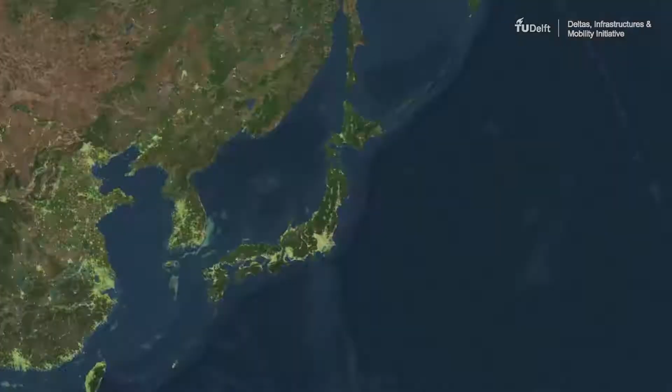Yuriage is in Tohoku, Japan, a region prone to frequent large earthquakes and tsunamis, and that has been struggling with a shrinking and aging population together with a declining economy for the last several decades. The reconstruction consists of the building of a coastal dike, which is the first line of tsunami defence, where also, through the implementation of spatial planning, residents were relocated from hazardous areas. The only rebuilding near the coast was for industries related to the fishing port.

Further inland, dikes were under construction along a canal to serve as a second line of defence against large tsunamis. The new residential area under construction further inland was made safe by elevating it by metres of landfilled earth. Public housing blocks doubled as vertical evacuation structures, whilst roads were designed to provide a straight route for horizontal evacuation.

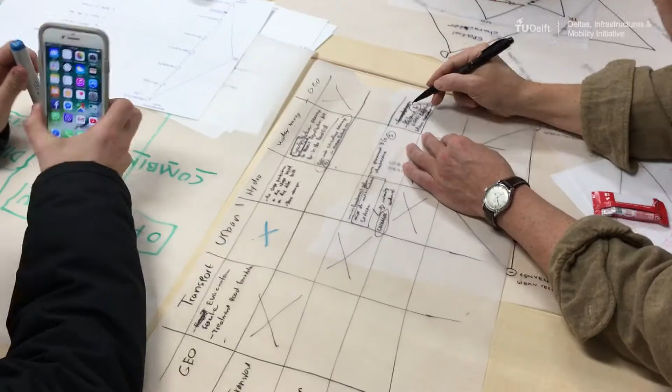By understanding, analysing and discussing the scope of reconstruction solutions from the point of view of each discipline, as well as in a team consisting of all 5 disciplines, methods for interdisciplinary working were tested, learned and experienced, and Japanese resilient solutions were applied to the Dutch case.

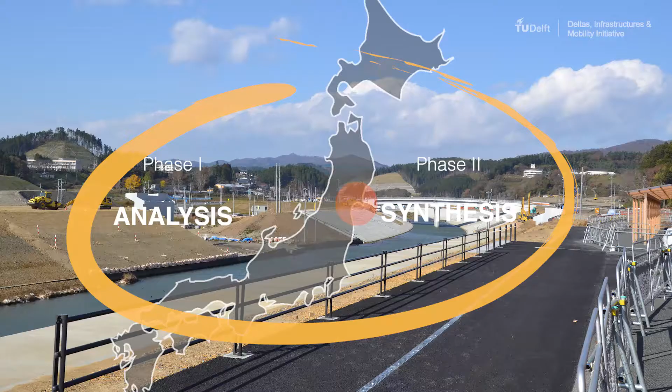The project involved 2 groups of students, an interdisciplinary project group and a group of thesis students. The big picture of the project was addressed by the interdisciplinary group in 3 phases: analysis, synthesis, and design. In the first 2 phases, the case of Yuriage was the starting point, whilst in the design phase, what was learnt and designed there was transferred to the Dutch city of Vlissingen.

After preparation in Delft, a group workshop held at Tohoku University aimed to study how the reconstruction of Yuriage was planned and implemented, and to understand where different reconstruction methods are positioned through a charrette method. This interdisciplinary scope of possibilities is built up from the scopes of disciplinary possibilities that are brought together in the charrette.

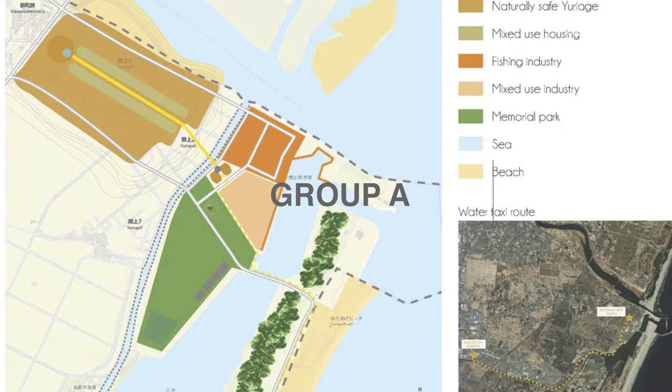After multiple rounds of discussion, the groups generated frameworks showing the linkages among the disciplinary scopes, which enabled the students to analyse relations among disciplinary decisions and to explain and assess the case from an interdisciplinary viewpoint. The frameworks were the base for spatial designs. Group A created a master plan for Yuriage based on 5 design criteria. These balance out multi-purpose and nature-based urban design with engineering intervention.

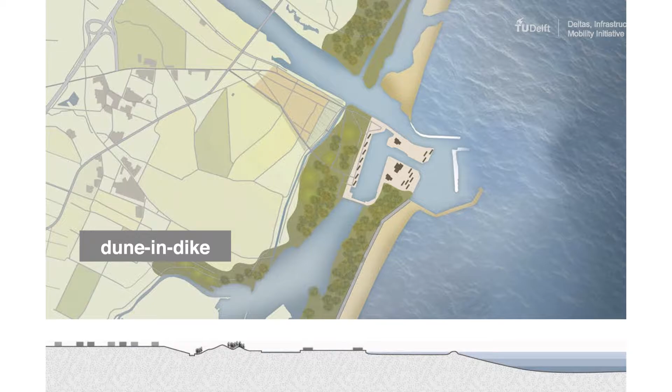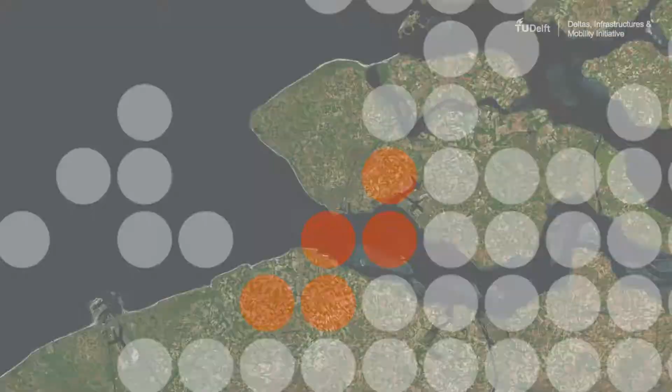Group B focused their design on using a dune-in-dike solution near the shore, where the dune system also functions as the base for a coastal forest, which is a traditional Japanese tsunami protection technique. The lessons learned from the tsunami reconstruction process in Yuriage were then applied to the Dutch context. Vlissingen was chosen because of its comparable location, demographics and economic issues.

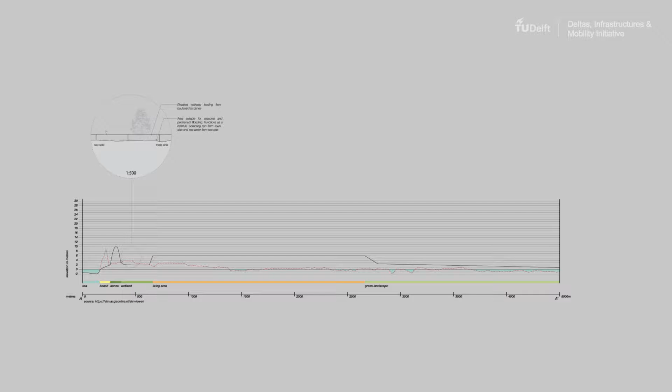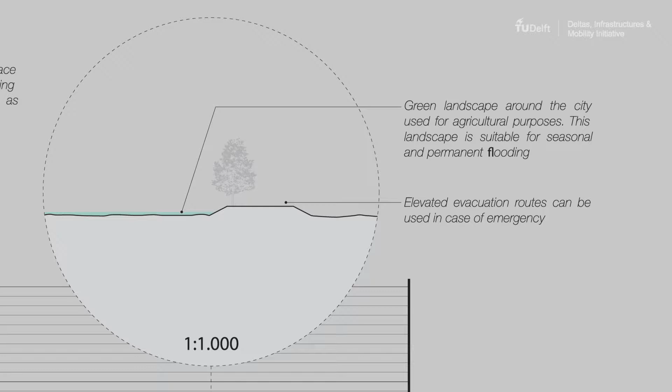To build back better, the whole group of students formulated 2 designs. Both incorporated multiple lines of defence, as learned from Yuriage. Coastal dunes and dikes were combined with parking structures and promenades. Further inland, residential areas were physically elevated in one design, and in the other were combined with canals dug to lead floodwaters from storm surge or heavy rainfall to a sunken polder outside the city core. Road and rail transport arteries were designed to incorporate use for both daily life and evacuation.

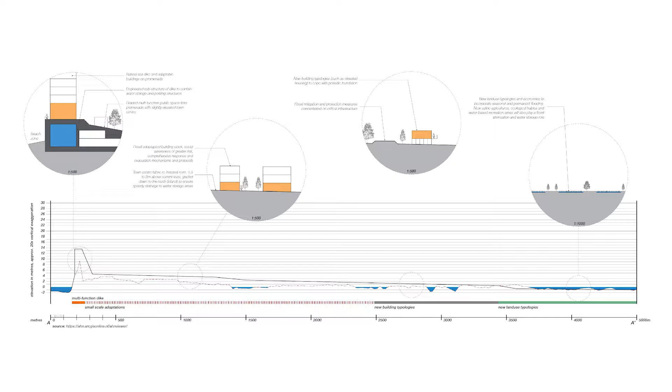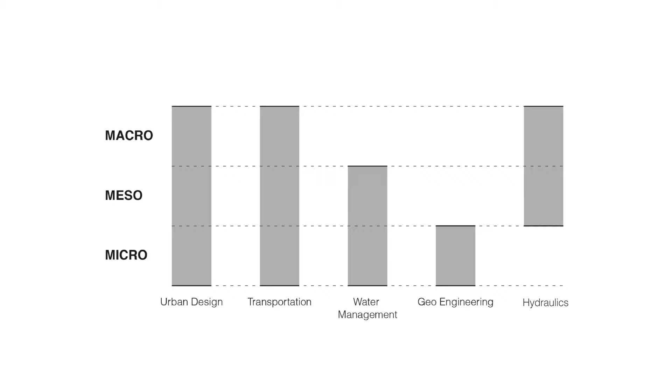These proposals were elaborated on by the interdisciplinary project group in an iterative process in which they would develop their parts separately and bring it together again in 2 steps. In addition to the big picture and detailed designs for Vlissingen, the group of MSc thesis students developed their individual thesis that addressed disciplinary topics in detail, but in the context of the other disciplines.

To make the tsunami reconstruction of Tohoku more resilient, the Dutch approach of regional design is tested. This approach balances out the local qualities on the larger scale and reinforces them on the smaller scale. For this scale, 3 urban designs are made: for a tsunami mitigating riverbed, renewable energy plan, and the development of a transit-oriented development location.

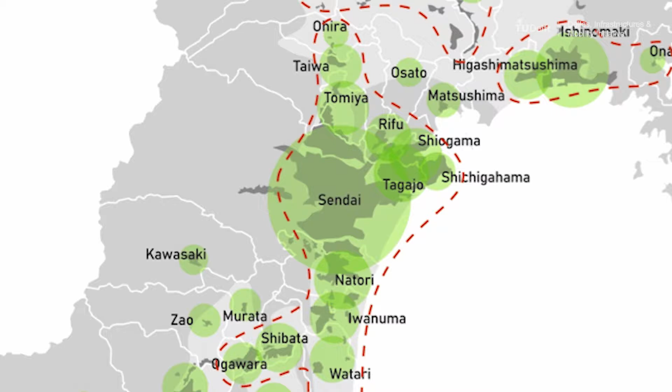The TOD is part of the transport and planning thesis, in which a regional transport design is made to respond to demographic changes of a shrinking and ageing society. Using a demand, transport and land use feedback circle, the design also integrates land use planning into the transport system, with the goal to be able to face an uncertain future with economic, social and environmental shifts.

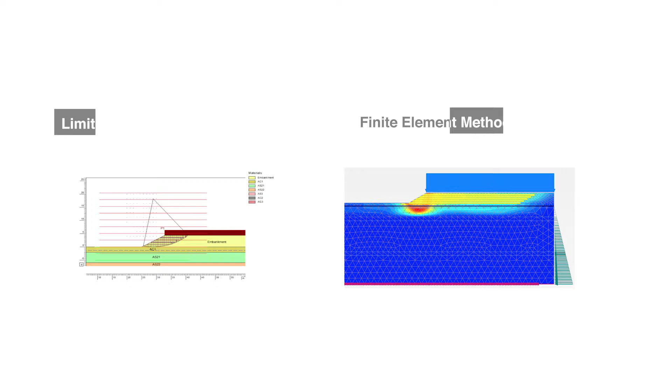The geoengineering project focused on the stability of geotextile reinforced slopes, with Yuriage raised area as the case study. Two methods were used for analysis, first using limit equilibrium method and second using finite element method. In Japan, a lot of concrete is used, and the application of geotextile could make these spaces less steep and multifunctional for ecological and recreational use.

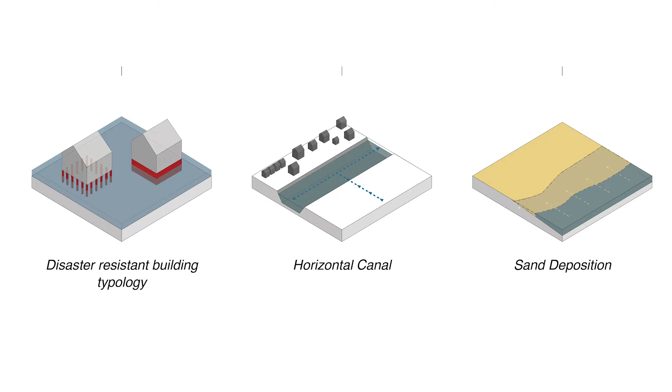The geotextile is also applied in the urbanism thesis, which takes the reconstruction of Yuriage to the level of modern urban renewal. This includes topics of water management and energy, and includes the introduction of spatial quality. To be able to qualitatively assess the tsunami resilience of a transport system, the first step is to deconstruct this concept into determining factors of tsunami resilience. This forms an assessment matrix that is also tested on Oahu, the most urban Hawaiian island.

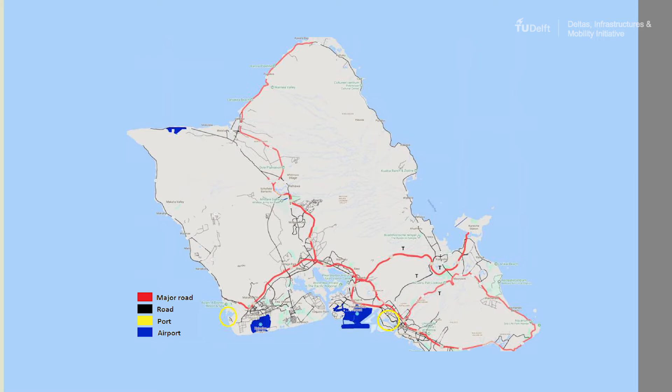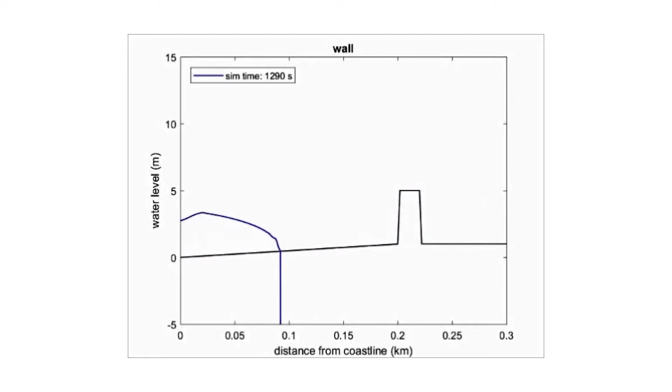The last project uses hydraulic engineering experiments and simulations of tsunami shoaling and run-up to optimize the effectiveness of coastal dikes and seawalls in mitigating tsunami damage.

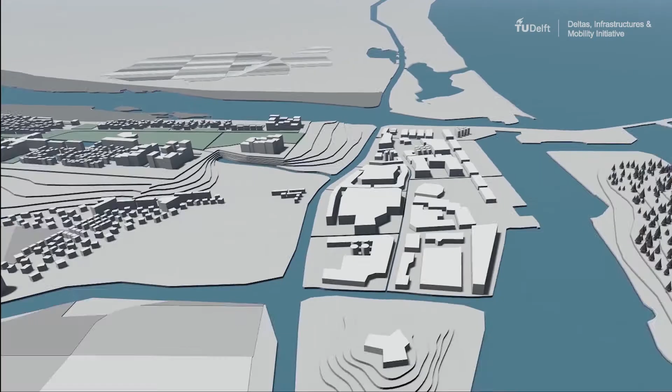The project as a whole delivered a lot of knowledge about resilient design and how land use segregation, multiple lines of defence and hard engineering methods from Japan could be merged with Dutch ideas of building with nature and multifunctional flood defence. The group also trained in the interdisciplinary approach and discovered how the 5 disciplines can interact, especially by doing the same process for 2 locations. To be able to interact on a deep level, it turned out that scoping per discipline really improved the exchange of ideas and discussion and brings a solid base for the design of future resilient cities.